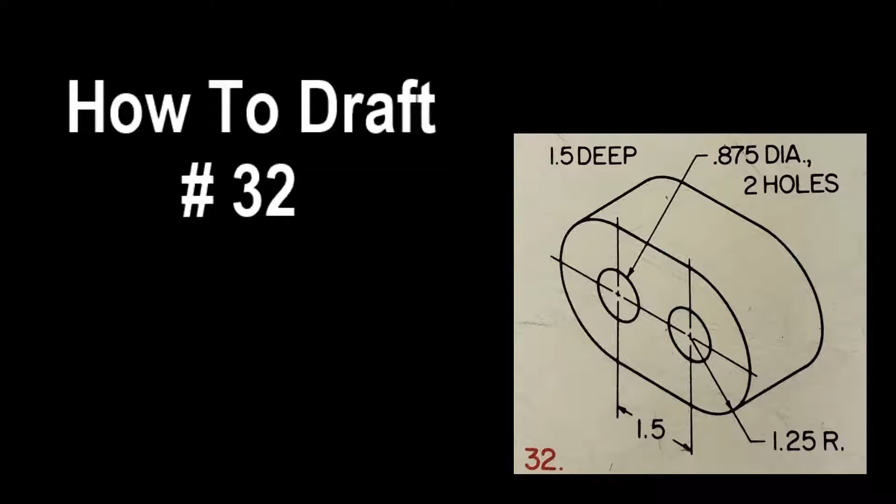So today we're going to show you guys the ins and outs of how to make some of this round, three-dimensional, and how to make it go back. This is the hard part. When you see this, I think you'll be shocked at how easy it is. I think you'll be pretty surprised.

So this is the drawing that we're doing, and you notice it kind of looks like a pill with two circles through it. I don't know how to describe it. It's some kind of part. And so we're going to show you kind of how we're going to get started on that.

So first thing I've done is I have squared up a piece of paper, which was in one of the first videos of how to get started with drafting. And so I have taped down my paper parallel to my T-square. And I'm using a wooden T-square here instead of a clear plastic one or one of the ones that we made for you guys. I had this one at home, so we're going to use it because I'm here in my shop at home working. So this is my T-square.

And again, I squared up the piece of paper parallel to my T-square so that the paper and the T-square are parallel. I kind of cheated a little bit. If you look really closely, yesterday I drew a bunch of borders, nameplates, and Lucky L on a paper, and then I photocopied it. And so then I'm just taping these down as I do all these samples. So if it's not exact or if it looks a little light in color, that's because it's a photocopy.

So one thing I always tell kids, if you start a project one day and need to finish it the next day, so you need to re-square up a piece of paper, always square it up off of something you drew the day before, not the edge of the paper, okay? So the first time you square up a piece of paper, you have no choice but to use the bottom or the top of the paper to tape it down parallel to your T-square. After you start drawing, we want to make sure if we are off a little bit the first day, we stay the same amount off so everything is square on our paper.

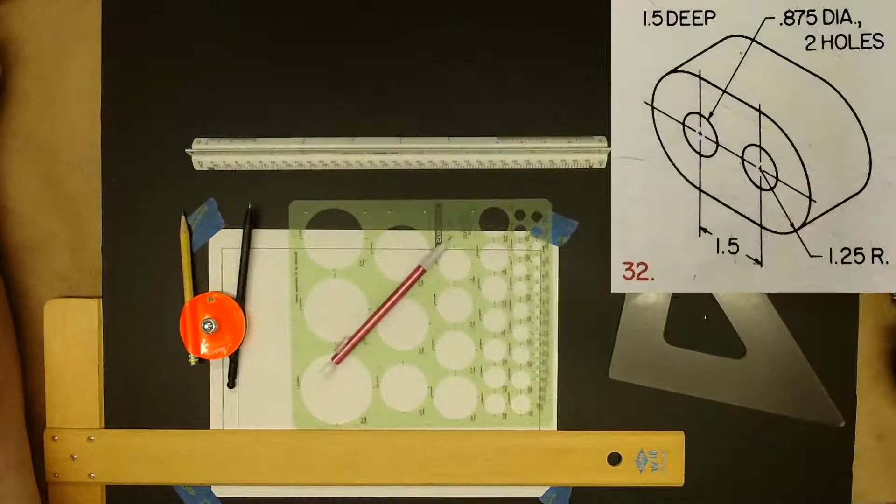And then you're going to need a compass as well. And last but not least, you are going to need a pencil. So those are all the tools that we're going to need to get started on drawing up our design. Okay, so let me get all this stuff off of here and tell you how we're going to get started here. So I got my T-square, got my scale.

Real quick, I'm going to have you take a look at this drawing here. You can kind of see my mouse there. I wish I could make my mouse much bigger. But the bottom of the Lucky L is right here, across the bottom, and then the side of the Lucky L is right here. And so what we need to figure out is where to start drawing this. Well, what I will give you as a hint is these crosses are the center of where everything starts. So we should place those crosses on the paper first.

So from the bottom of our Lucky L up to the middle of our crosses, or this line running through the center of those circles, is the same distance from here to here as it is from there to there, which means the distance from here to here is all the same, and that's 1 1/4.

So on my paper, from my bottom border, I'm going to come up 1 1/4, and I'm going to draw a very light line, okay? And this is going to be that center line. Well, I don't even know if you can see that. I might have to darken that up just a little bit so you can see it.

I can always erase it later. So that is the center line of my two circles. Now I need to figure out how far it is from here, or the Lucky L, into the center of the circle. And again, if we go back to the logic that from here to here and here to here and here to here are all the same, if they don't notate that that's different, we know this is the same on

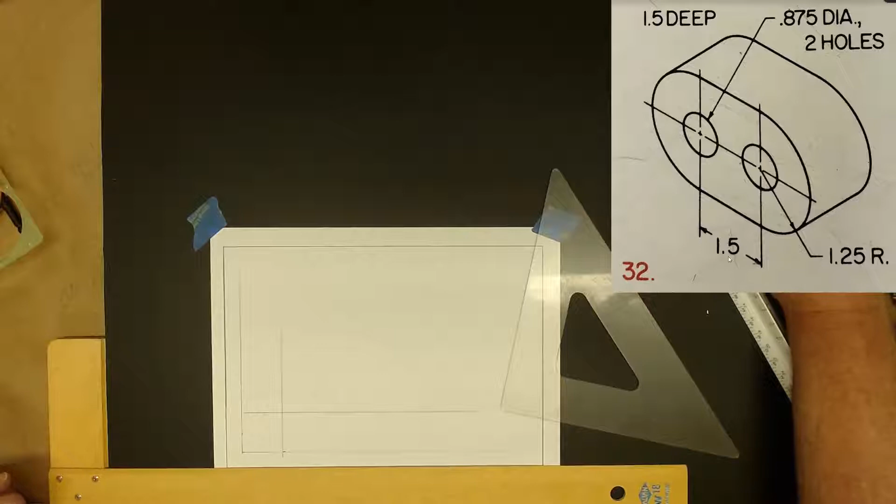this side. So now I'm going to come over here 1 1/4 and draw a vertical line. So I'm taking my T-square and triangle, and for my Lucky L, I've now gone over 1 1/4 and up 1 1/4 and drawn that cross. Okay, so the next thing is we need to do that other vertical line, which is right here. Well, that's pretty easy, pretty straightforward. It says it's 1 1/2, so I'm going to go over 1 1/2 and draw me a little line here, and again a nice light line.

And that's kind of the setup for getting started, okay? So this might be a better view here. I have my Lucky L down here, and I went up 1 1/4, I went in 1 1/4, and drew this first vertical line. Then I went over 1 1/2 and drew a second vertical line. Okay, so that's pretty straightforward.

Now I'm going to set my compass and I'm going to draw the round pieces on each end, these half circles, if you will. We'll get those drawn up, these half circles. And so the way this is going to look is I'm going to take my compass, I'm going to set it to 1 1/4 because we're dealing in radius. So the way I'm going to do this is I'm going to loosen up this bolt just a little bit so that I can adjust this open and close with one hand.

I'm going to put the compass, the stabby point at 0, and then I'm going to set the sharp part of the compass at 1 1/4. So I'm going to take my time, make sure I get this right. That's 1 1/4. Now, I could do it that way on the scale, or guess what else I could do? If I put my stabby point on that cross there, it should touch my nameplate or my Lucky L on two sides, okay? And it does.

So for that first arch, and I know kids when they use compasses, they hold them up here and twist. I do it a little differently. I'm going to put this down here. I'm going to lean the compass forward a little bit, and I'm going to rotate it as it moves forward. Now, I am left-handed, so sometimes it's a little weird. I did that one with my right hand, and now I'm going to do this with my left hand, and voila, I've drawn those two round ends.

Now, real simply, I'm going to connect those two at their tangent, or their highest point up here, and at the lowest point down here, which is the Lucky L. Okay, and now I have the starting shape of the front view. We do need to put some circles in the middle here, but we're going to come back and do that in a little bit. Now, I've taught you on the H and all those other drawings that you've done that if you want to make something 3D, you're always going to go up and to the right diagonally. Well, we're going to do the same thing here.

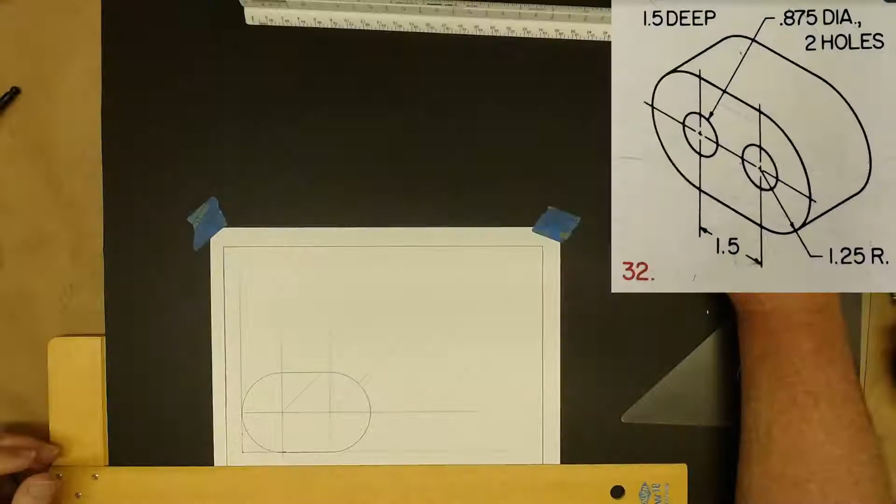And to start this, we're going to go to the middle of the cross because everything we're doing is coming off the center of those crosses, correct? I mean, basically the whole drawing is based off of those. And so now I need to know how thick or how far back does this go. And so we need to know this distance here, and right there it says 1 1/2. So we're going to go back 1 1/2. So I'm going to take my scale, and from the center of each cross, I'm going to measure back 1 1/2 and put a mark. And we're going to do that from both of them.

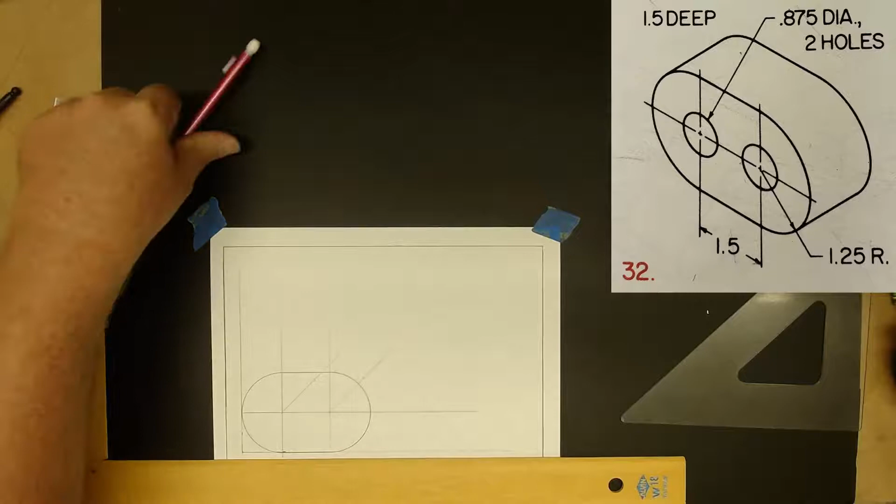And this might confuse you a little bit. Notice this one is just outside the shape, and this one is just inside the shape, and that's how it's supposed to work. Now, I didn't play with the compass. I didn't readjust it. I didn't do anything with it because I'm not a 7th or 8th grader. I just set it aside because this is still set to 1 1/4, which is what we need, right?

So now I'm going to go up to my line that's 1 1/2 inches out, and I'm going to draw part of a circle here, and I'm going to go just a little bit more than 3/4 of a circle. Okay?

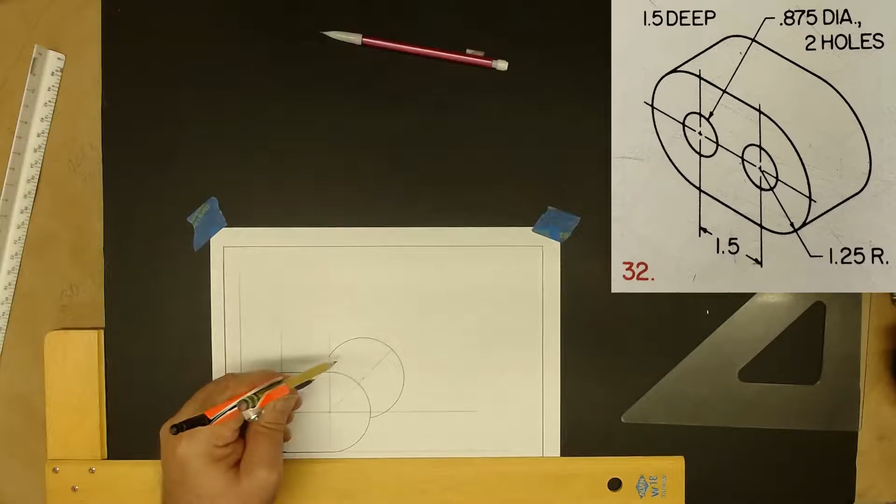All right. And then I'm going to do the same thing on my other line. I'm going to go back 1 1/2, and the compass still set to 1 1/4. I'm going to draw another circle. This time it's more like a little over 1/4 of a circle. Okay? Can you see that?

All right, so now we're going to add some tangents. We're going to zoom in a little bit here. We're going to take that shape and really quickly, using the same triangle we used to draw that diagonal line and that diagonal line, we're going to come over here to the very edge with our T-square. And if we've done this correctly, our T-square and triangle, we should be able to draw a tangent line down here that touches the very outside edges of those two circles.

And we're going to do the same thing up here. The very outside edges of those two circles. Whoops, I didn't have my T-square placed very well here. Okay, so it looks a little gummy over there. And then at the very top, we're going to catch the very top of these two circles as it goes across.

Okay, now let's do a little bit of erasing. So we're going to get rid of this here, and we're going to get rid of this here. And we're going to get rid of that little overlapping circly thing. Okay. And I'm going to go ahead and erase those diagonal lines. I drew those super light because they need to go away. All right. And the cross that's sticking up through my top portion of it, I can get rid of that.

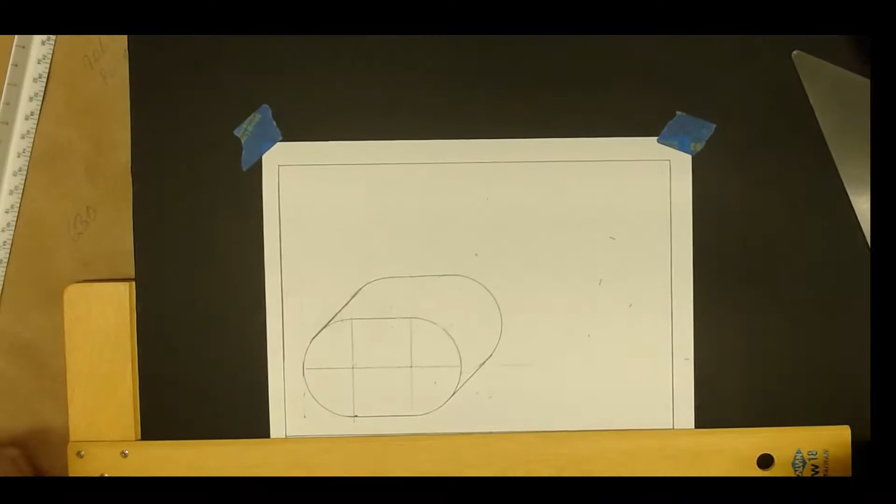I can erase the lucky L at this point. We're going to start cleaning things up here. And notice I still have these crosses here. We're not quite done yet, so I'm going to get rid of this lucky L over here. And again, I'll go back and clean this up some more when we're done here. But we're done with the lucky L. The rest of this is unused, so we're going to erase it. And when I'm done and not recording, I'll take some time to clean this up for you so it makes more sense, okay?

All right, so now we still have two circles to put there. And if you look on the drawing, it says that those two are, what are they? Let me get a better view here. Each of those circles is 0.875 diameter, which is 7/8 diameter, which is a really small hole to make with a compass. You can do it, but they're kind of hard. So what I'm going to do is I'm going to take my circle template, and I'm going to flip it over so I can see which one is 7/8, 1/2, 9/16, 5/8. We're coming around the horn here. 7/8 is right here. So I'm going to take my 7/8 circle.

Oops, I've got the wrong camera view on, so you guys can't even see what I'm doing here. So this is my 7/8 circle right here. And I don't know if you can see this if I put it down, but there are 4 black tick marks on my circle template. And I'm going to take those 4 black marks and place them on the center of my cross. So the tick mark up here is lined up with the top of my cross. The tick mark down here is lined up with the bottom. That's lined up with the right, and this is lined up with the left. Lined up, not signed up.

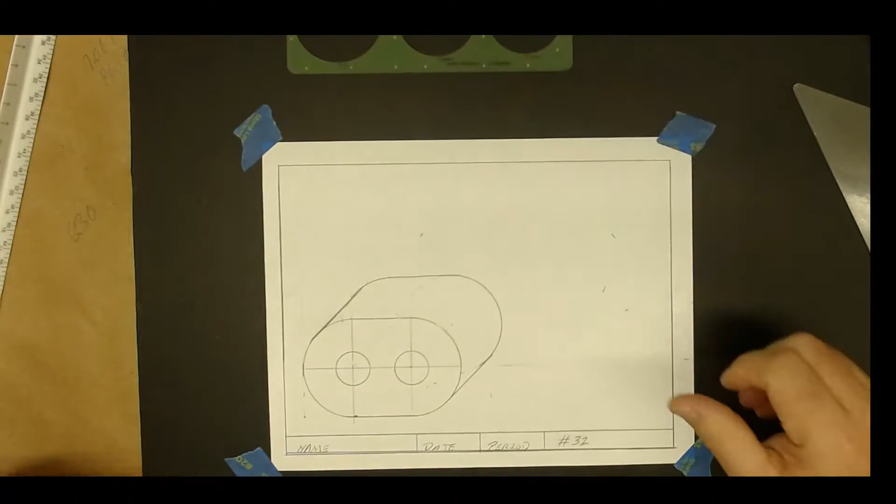And I'm going to take this and just come in here and trace that one. We're going to slide it over here, and we're going to do the same exact thing. Okay, and so now, again, we got some cleanup to do. Make this nice and neat, but you get the general idea. I'm going to go back and darken it up a little bit, and then we got to add the measurements. Don't forget to add the measurements. I'm not going to take the time to walk you through putting those measurements on, but they're going to basically look exactly like they look on the drawing here.

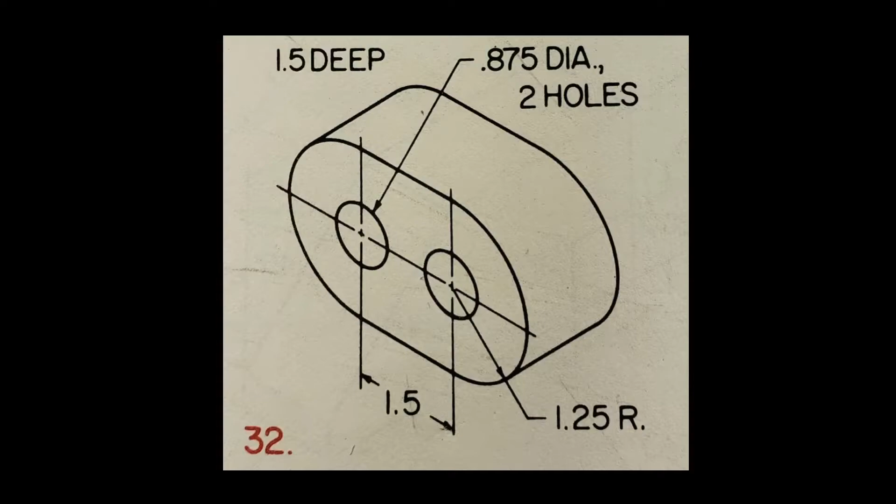I'll come in and I'm going to tell you that from here to here is 1.5. I'll tell you from here to here is 1 1/4 radius. I'll probably bring an arrow up here somewhere to tell you that the two holes are 7/8 diameter, and then somewhere maybe down here or out to the side I'll tell you that the whole thing is 1.5 inches deep. So that's how you do plate number 32.

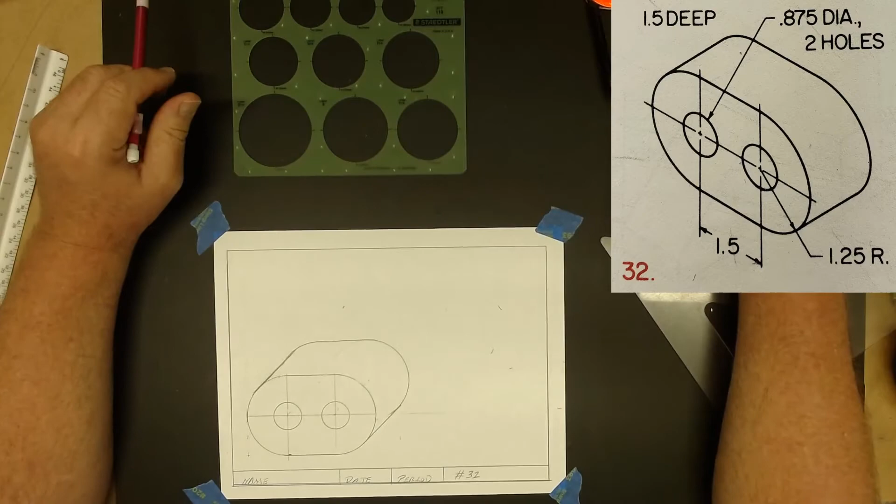It's one of the more technical ones. Once you understand how to make something round, three-dimensional, that will transfer to other drafts that you've done. So make sure you fully understand how to do it. So moving forward, you'll be able to do it again and again and again. All right.